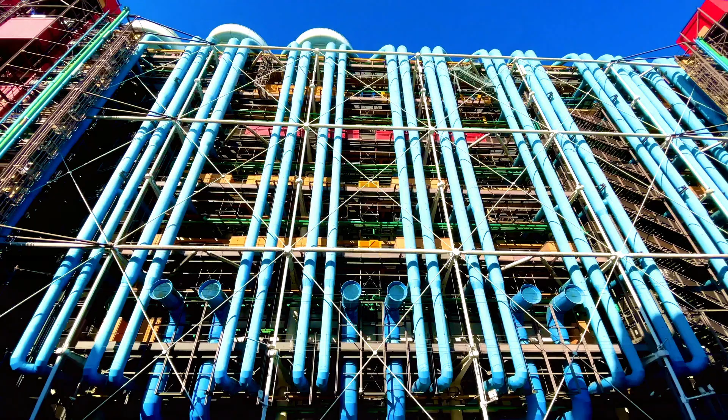But a building that's famous for its pipes is the Centre Pompidou in Paris, France. Renzo Piano and Richard Rogers designed it in a way that all of the service equipment would be shown on the outside, so the inner workings of the building are shown on the outside. Here you see pipes on this side of the building for water, ventilation, and so on.

And on this side of the building, you see the circulation. So you see this beautifully bent glass that is covering the hallways and the escalators, which are famously known as the caterpillar of the Centre Pompidou.

Now, I had the chance to work for Elioth, who was the engineering company responsible for the renovation of this facade. And we had to replace the glass, the beautifully bent glass, because of changing security norms. So we went on a mission to find a new home for the glass.

And luckily, we found the young designer firm called Maximum, who had a client that needed this bent glass for this project right at the same time that we were disassembling the glass. So the caterpillar became a butterfly.

Now, why do I care so much about the reuse of this glass, or the reuse of pipes, or the reuse of other building materials in buildings? Well, as actors of the construction sector, we have a crucial role to play in the climate crisis. Buildings are responsible for about 39% of all of our greenhouse gases,

and we've made considerable progress in how to reduce operational emissions, so that's related to the use of the building, so think of heating, cooling, ventilation, lighting, and so on. But the use phase of a building is only part of the whole life cycle of a building.

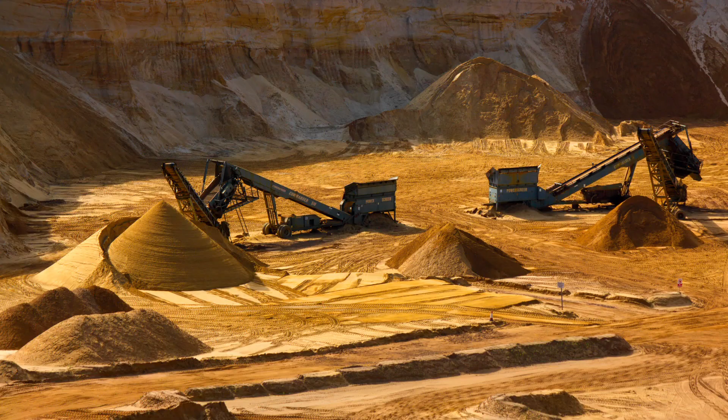When you look at the full life cycle, you also have to deal with embodied emissions, which is related to material extraction, production of building materials, bringing them to the sites, construction, maintenance, and end of life, which is usually demolition. It's not only about the greenhouse gas emissions, it's also about resource depletion. We're depleting a lot of resources for construction.

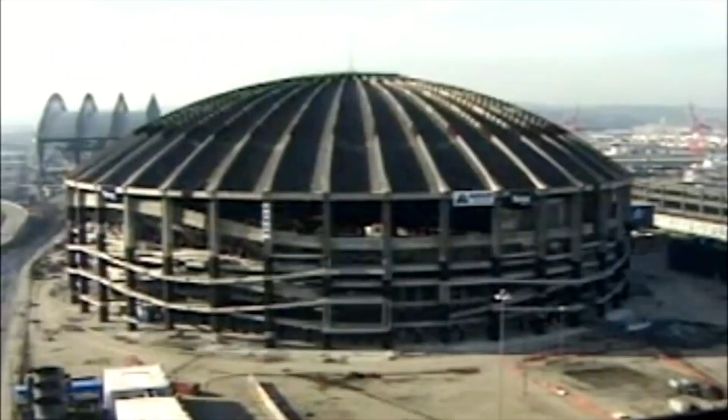For example, we mine about 40 billion tons of sand per year just because desert sand is too fine for construction. This creates a huge biodiversity problem. Sand mafias are created as well, so we need to deal with this. We're also creating a lot of waste.

Here is the Kingdome in Seattle that was demolished only 24 years after its construction. And this building was designed to last for 1,000 years. So in Europe, about 30% of all of our waste comes from the construction and demolition sector, and this number is even higher in Switzerland.

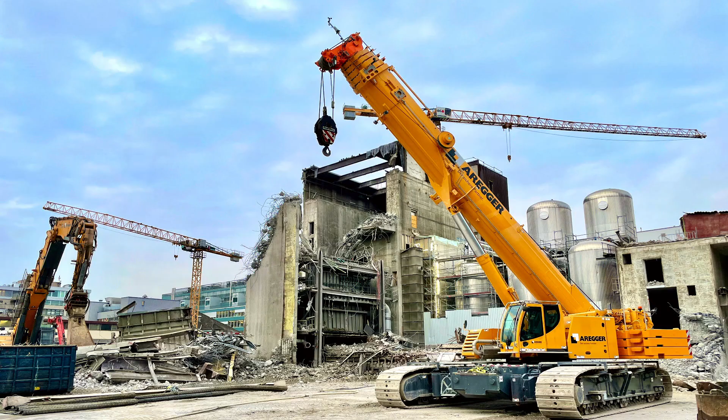So what's wrong with the construction industry? We build in what we call a linear economy model. So we extract raw materials, we produce building materials, we use them, and then we dispose of them.

What we need is a paradigm shift towards a circular economy model, in which we use only renewable resources, in which we use our buildings as long as possible, in which we repair our buildings, in which we reuse our building components, and if all else fails, we recycle them.

Now let me pause a little bit on the difference between recycling and reuse. So when you recycle a material, you take the component and take energy to bring this component back to its raw materials. Think of wood chips, of melted steel, of crushed concrete aggregates.

On the contrary, when you reuse a building material, you keep the component as it is. So think of reusing a wooden window frame, or a steel beam, or a concrete slab. Now, our lab is focusing mostly on reuse, and here's why.

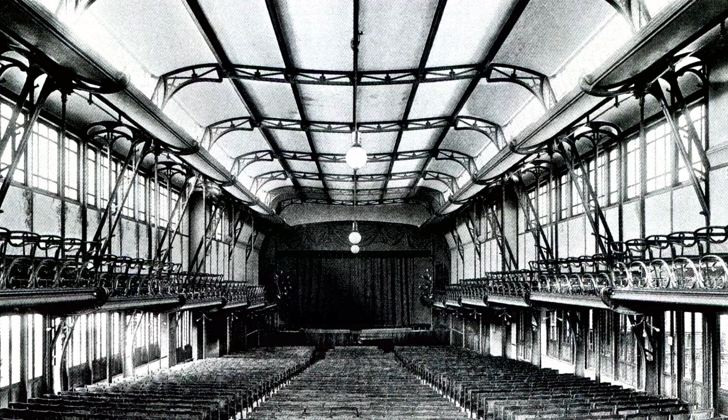This is the Maison du Peuple, designed by Victor Horta, a Belgian Art Nouveau architect. And this building was disassembled in 1965. People thought this structure was so beautiful that they stored this structure for 35 years until they could find a new home for the structure, the Hortazaal in Antwerp.

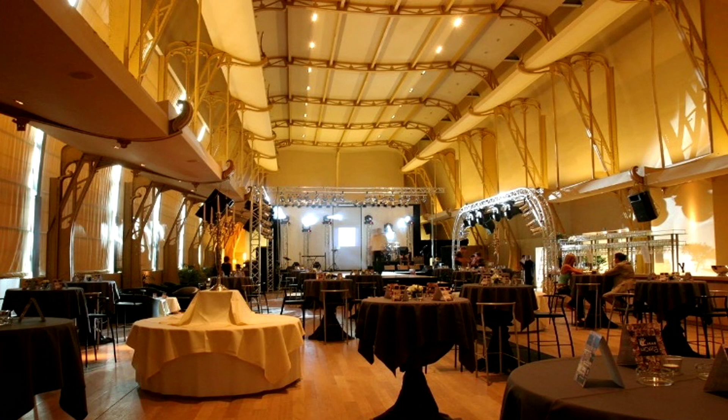Now, if we had recycled this structure, we would have used energy to melt back down the structure to its raw material. This would have probably downcycled the material. And wouldn't it have been a shame to lose all of the effort, the labor, the energy that went into making this beautiful structure? Now, you're probably thinking, well, we can't afford to store our materials for 35 years, right?

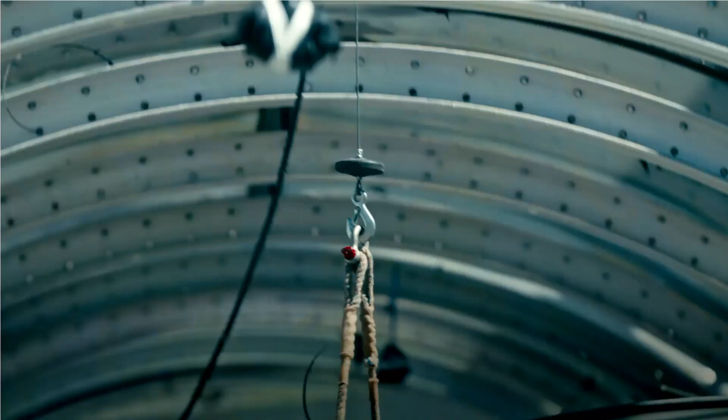Well, you're totally right. We have to align the moment when we disassemble a building with the moment when we reuse those materials in a new building. And that's what we did with the Centre Pompidou, where we had to disassemble the materials at the same time when the new client needed them.

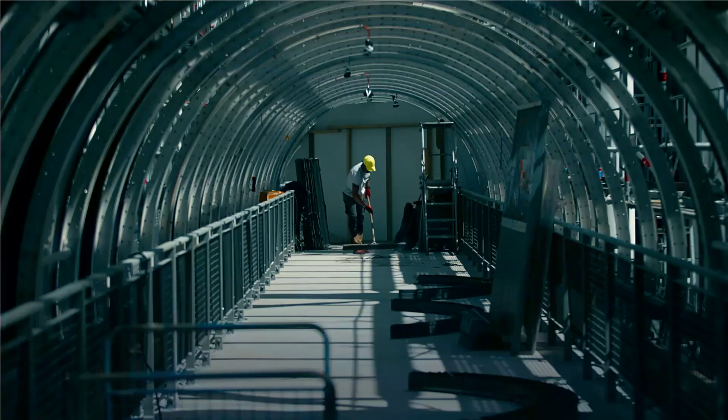Now, it's relatively rare today that the end of life of one building aligns with the start of life of another building. So to be able to move towards circular construction on a large scale, and not just for iconic buildings like the Centre Pompidou, like the Maison des Peuples, we need 5 things. First, we need data. Data on how, when, where materials will become available for reuse.

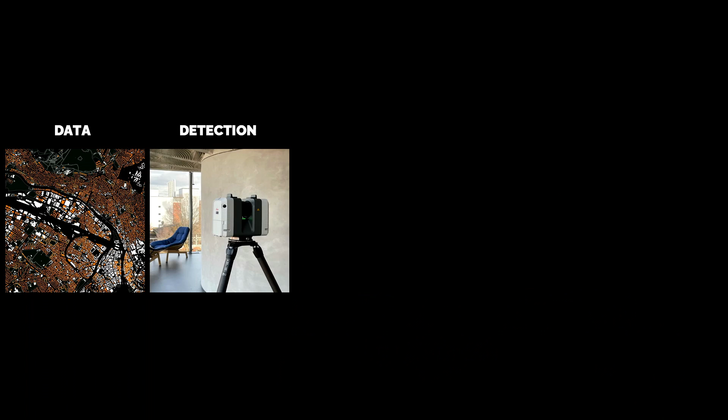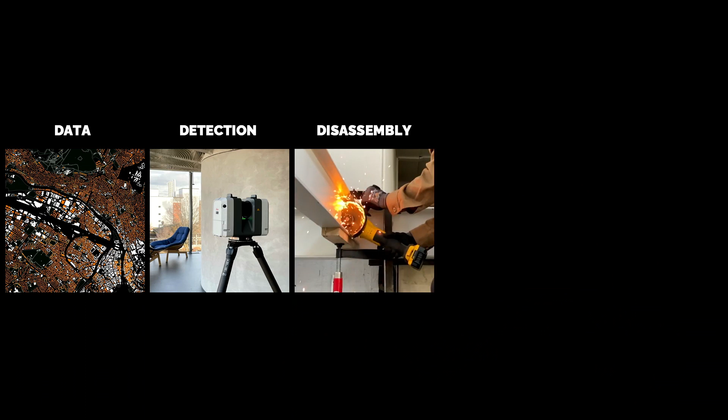Second, we need detection methods. Once we have identified a building that will be demolished, we need to detect which materials are in the building and in what condition they are. Third, we need smart ways to disassemble a building. We need it to be cheaper than demolishing.

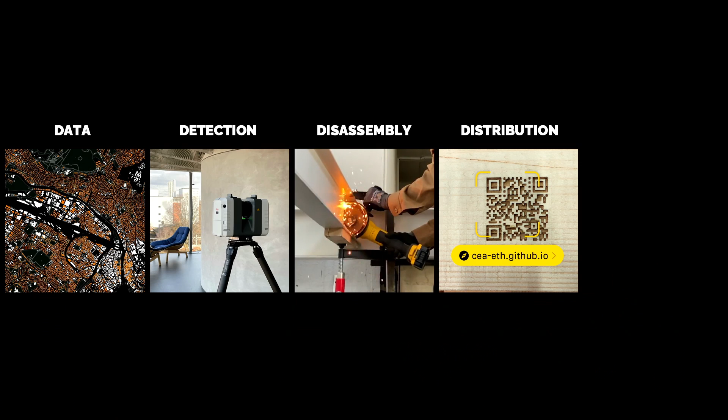And fourth, once we have disassembled a building, we need to distribute those elements by giving them an identity, by tracking, tracing, and trading them. And fifth, we need to completely change the way we design and fabricate our buildings. Now, these are also the 5 steps of our research at the CEA lab that I will talk about today.

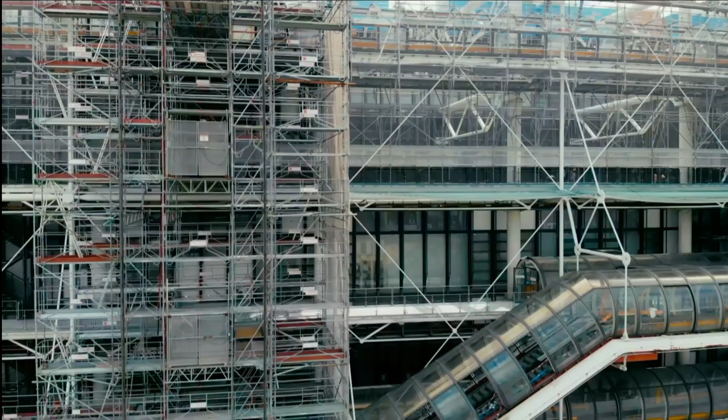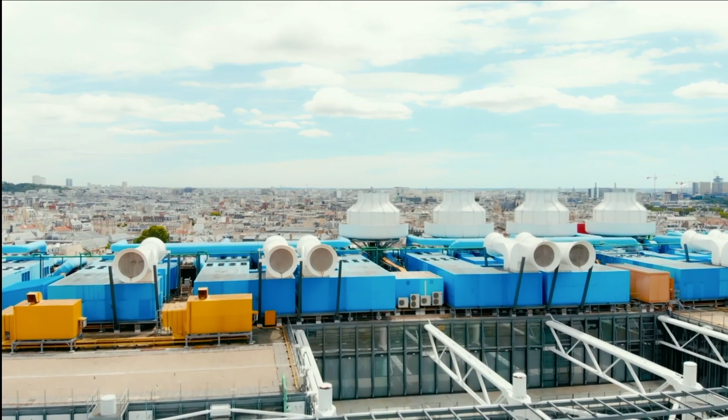So our question is, could digital innovation help us disassemble a building and reuse its building materials in a much faster, better, and cheaper way than ever before? Because only then will circular construction be competitive enough so that we can abandon the linear model. Could digital technologies help us save not only the glass of the Centre Pompidou, but also all materials of other buildings worldwide? Could digital technologies help us use buildings instead of the earth as a mine? Could buildings become material mines, material depots, material banks?

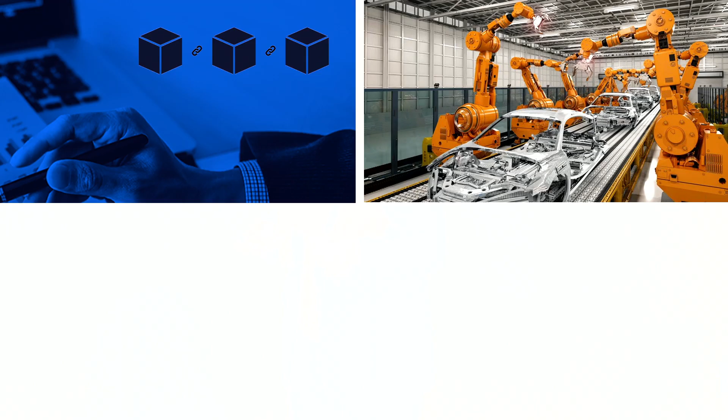Now, the construction industry has been famously known to be slow in adopting digital innovation, even though digital innovation is everywhere and growing. We've used blockchain technology in about 20% of traditional banks. We use robotic manufacturing everywhere in the car industry. We use artificial intelligence or AI literally everywhere, from online marketplaces like Amazon to dating platforms like Tinder.

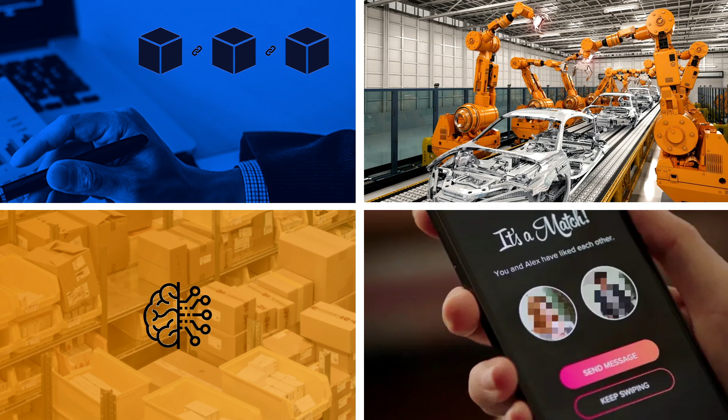So we were wondering, could these digital technologies help us bring the construction industry towards circularity? Could these digital technologies help us face the biggest challenge that construction is facing today, this transition to a circular economy? And that's exactly what the CEA lab does. We explore those digital technologies that are used a lot in other sectors. We bring them to the construction sector to see whether this can improve our circularity.

So to do so, we had a flagship project that we worked on in the last few months, where we actually disassembled the building and reused the materials and tested all of those digital technologies on this flagship project. And we did this together with Materiuum, one of the prominent reuse actors in Geneva, where we disassembled this building here that you see on the left. That was an old car warehouse in Geneva. And with these timber beams, we built a dome-shaped greenhouse in Zurich.

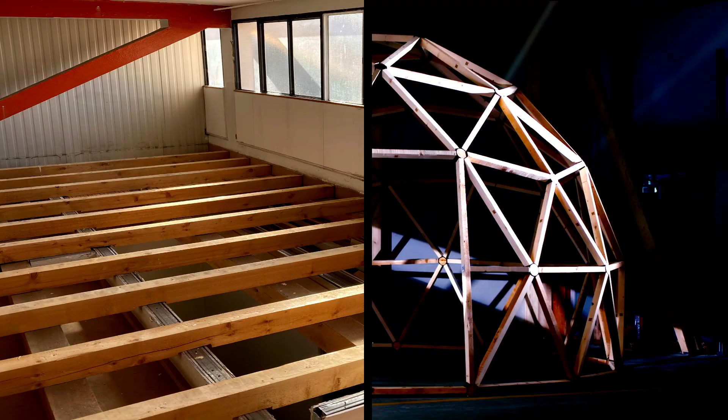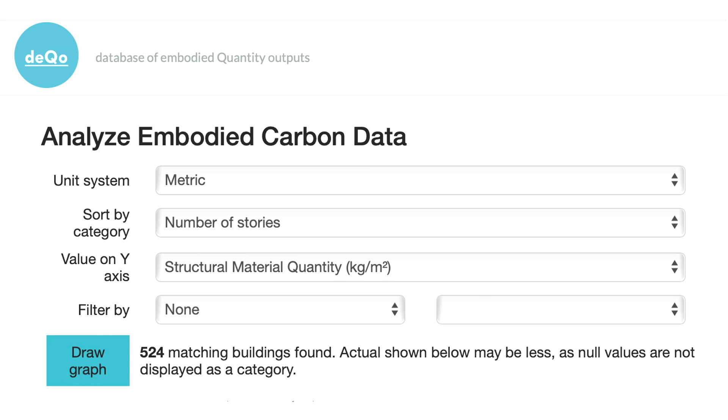Now, as you've seen, our research is divided in 5 topics, and the first is data that we need to predict when materials will become available for reuse. Now, when I was doing my PhD at MIT, I was already working a lot with data. I created the database of embodied quantity outputs, or deQo, which is a database that collects structural material quantities from structural engineering companies such as Arup, Thornton Tomasetti, SOM, and so on, so that we could compute the embodied carbon of these building structures.

Now, one interesting thing that I learned from here is these are the type of graphs that you can see on deqo.mit.edu. So here on the y-axis, you can see the structural material quantities in kilograms of material per square meter of floor area. On the x-axis, you can see the number of floors. So you see here on this graph that the higher you build, the more you need materials per square meter of floor area.

This is interesting because this was confirming what Fazlur Khan, the famous skyscraper architect and engineer, already told us in the 60s, that we pay a premium for height. The higher you build, the more you need to take into account other loads like wind loads, for example.

Another thing I learned from my database was that the Beijing Olympic Stadium, also known as the Bird's Nest, uses more than 10 times the embodied carbon compared to the London Olympic Stadium. Now that's interesting because the London Olympic Stadium was built 4 years later with a change of mindsets, right? Sustainability became much more important, and they set this right at the design stage as a goal.

So they used lower carbon concrete mixes. They reused some materials from a gas pipeline construction site nearby. They also designed the stadium to be partially disassembled after the games. And so you see that if you put the right goals at the design stage, you can really improve your impact on the environment as an architect, as an engineer, as a contractor.

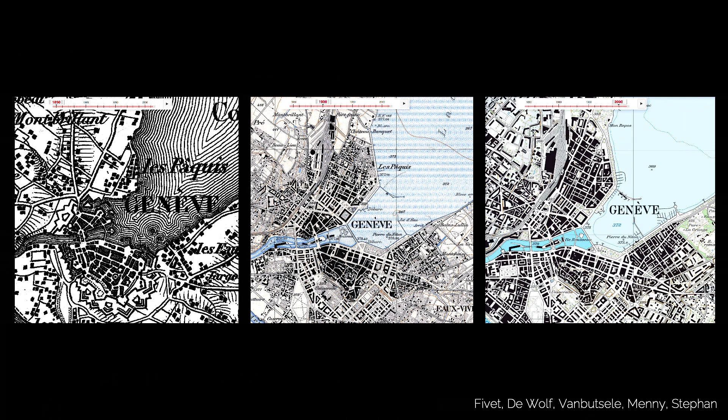Now then, I did my postdoc at EPFL, where I upscaled this research on the urban scale, where I looked at the city of Geneva. So we looked at embodied carbon emissions throughout time. So we went into the archives until 1850. And so we mapped the embodied carbon and construction/demolition from 1850 till today. This is very interesting because the past can teach us a lot about why buildings are getting demolished or constructed.

Now at ETH Zurich, at the CEA lab, we look not only at the past, but we also try to look at the future. We try to predict when buildings will become available for reuse. To do so, we use AI, artificial intelligence, and more specifically machine learning, to predict when these materials will become available. We apply big data analytics on various data sources that can help us detect demolition sites or renovation projects and so on. So algorithms can identify patterns in the data to help us make those predictions.

So for example, here you see the machine learning work of one of my PhD students on Google Street View data. So we have a lot of images from facades on Google Street View, and so we labeled these images with an online annotator so that we could train the model. We explored instance segmentation to identify reusable components. We used a mask region-based convolutional neural network framework for computer vision tasks to detect objects such as windows that are available for reuse from those images of those facades.

So as I mentioned, we use various data sources. Google Street View is one of them. There are many, many images for many cities that are available that we can learn from, but we combine this also with cadastral data. Lots of cities also have geographical information system maps, GIS data, and the city of Zurich, we're quite lucky here, has a lot of data.

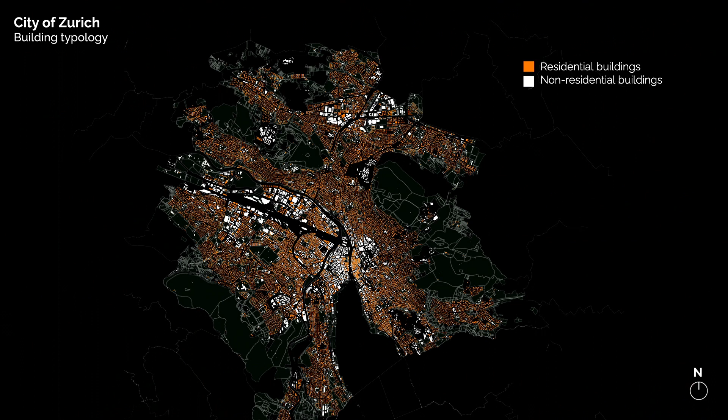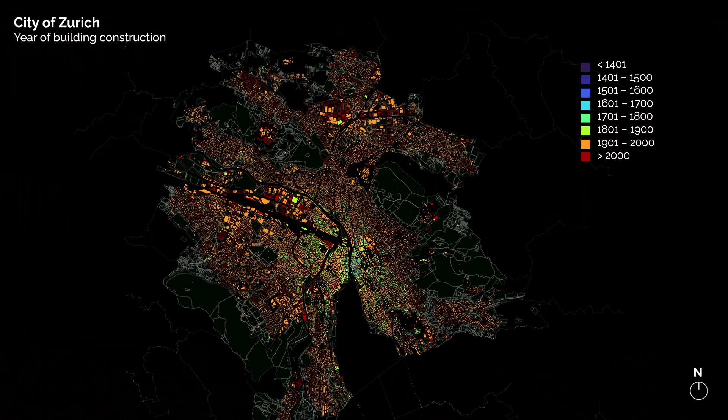We also can gather a lot of information these days from social media. That's also super interesting for us to work with. From public records, we have lots of archives and other data that the city of Zurich makes available to everyone. Another thing that's very interesting is using data from insurance companies, because they also try to predict the future. And then, of course, data that comes from our colleagues.

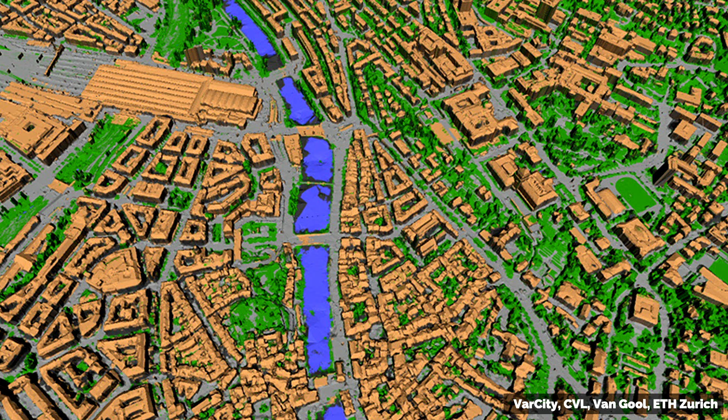The Computer Vision Lab, for example, here at ETH Zurich, has developed this project called VarCity, where they made a 3D model of the city of Zurich based on aerial data, based on public webcams, and so on. We're also quite lucky here that this photographer in Zurich took some pictures of lots of buildings in the 20th century with the exact addresses of all of those buildings, so we can actually compare them to what they've become today. And this helps us also to understand how buildings evolve over time.

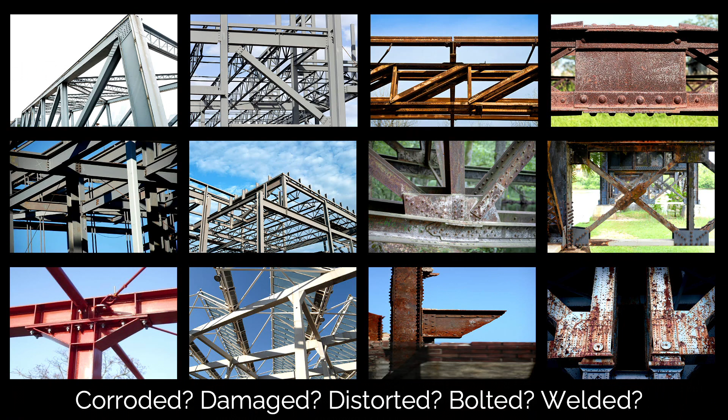Now, once we've predicted which buildings are available for reuse, we also need to check whether the materials are actually suitable for reuse. So we also use machine learning for this. We do this work with Politecnico di Milano, where we define different evaluation metrics and use image classification to define which structural elements can be reused or not, based on things like, are they corroded, damaged, distorted, are the connections bolted or welded, and so on. So machine learning, and computer vision in particular, shows really promising potential for collecting data visually on building-specific characteristics that are useful for reuse.

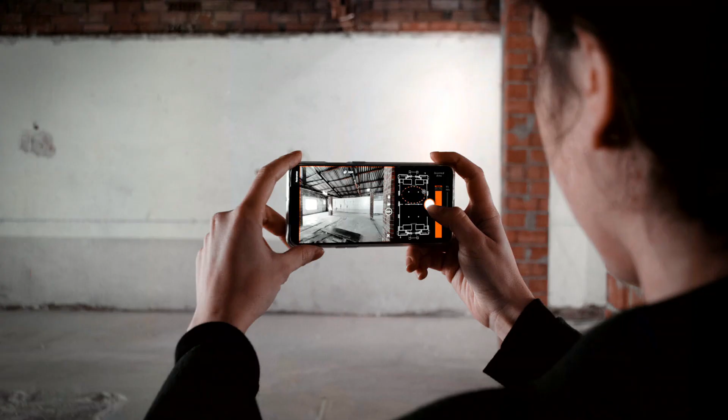All right, so once we've identified buildings that are about to be demolished, we zoom in onto the building, and we try to detect which materials we can reuse. So we use a lot of digital technologies in the field of reality capture, and this goes from simple photos from our phone cameras to photos taken with autonomous devices like drones.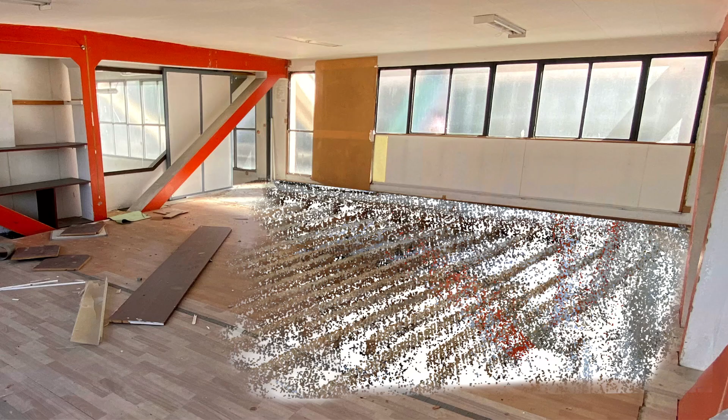Or we also use webcams on our hard hats that are connected to a software that reads where you're walking in the building throughout your scanning. So here you see one of my PhD students using the OpenSpace.ai software to do so in the building in Geneva that we disassembled. So then we use photogrammetry to process the images into estimated point clouds. So these are point clouds from the building in Geneva that we disassembled.

What's interesting is that you always have to be on the spot when you want to have some material salvaged from a building. This was the old Fiat, Lancia, and Alfa Romeo importer, and this building became obsolete. So they're going to demolish it for something more tall, probably. And usually when the buildings are obsolete, they give them to the police so that the police can do some training and explode some doors or walls and so on to break into a building.

And then after the police is done, then there is my time window before the demolition starts where I can do my research and I have access to the building and I can salvage any material that I want. So that's usually how our research works.

We also scan buildings that are not so soon set for demolition, but using light detection and ranging, so LiDAR scanning techniques. So we tested this full-scale LiDAR scanner that we borrowed from the Design++, so the Center for Augmented Computational Design in Architecture, Engineering, and Construction that we collaborate a lot with. And we scanned the DFAB house at the Nest building in EMPA.

So the Nest building is a building at EMPA where you can test some of our research. So we actually get to build entire units, test our research on a scale 1:1. And my colleagues from the National Competence Center of Research for Digital Fabrication, the DFAB NCCR, have built this DFAB house in the Nest EMPA building.

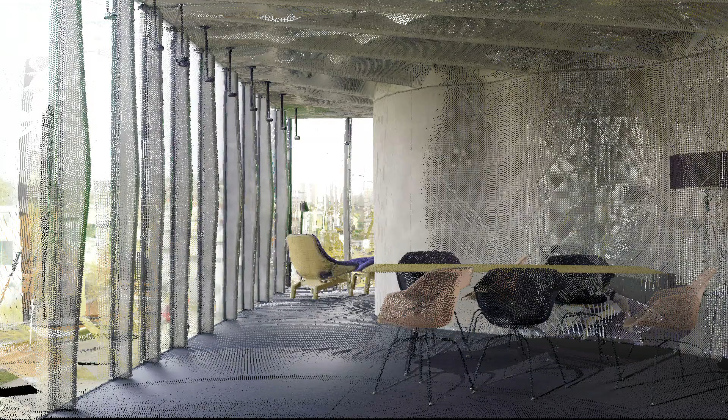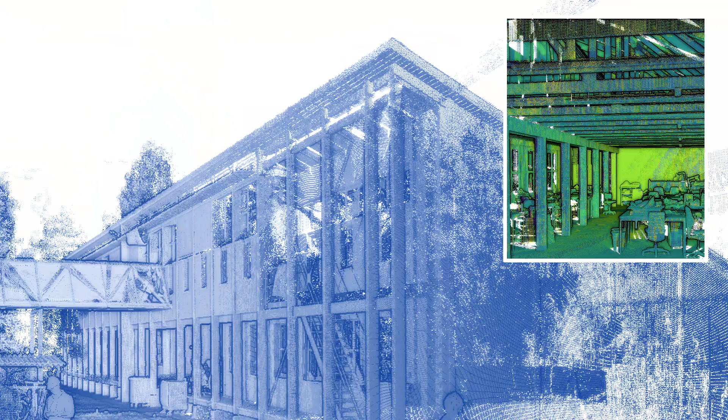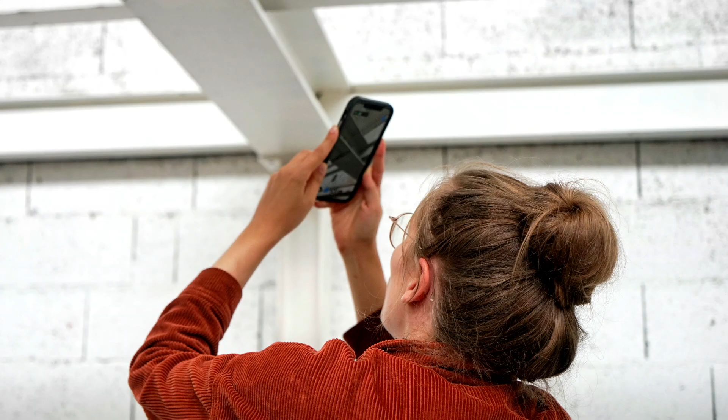All right, so we also take a look at mobile equipment, industry standard LiDAR, digitization systems, and so on. Here is another LiDAR scan of the Huber pavilions. Maybe those of you who've been to the Hönggerberg campus have seen them. They're about to be disassembled, and we scanned them beforehand. We also tested some apps on our smartphones.

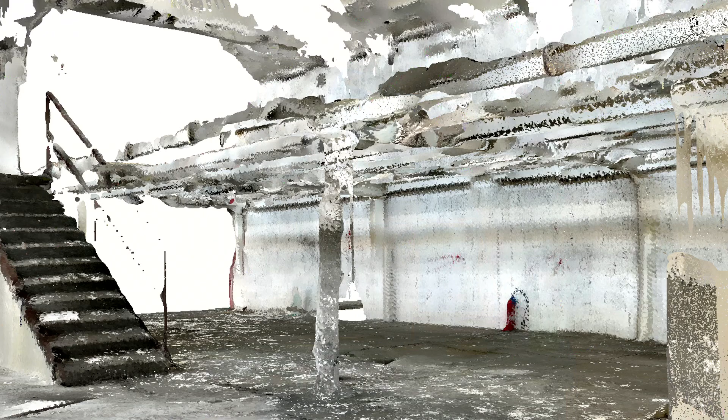This is me scanning the building in Geneva with my smartphone that has some LiDAR capabilities, using apps on the phone, just because we think it's important to also test mobile-based, accessible equipment, right? The LiDAR scanner I showed you in the DFAB house is super expensive, so we cannot expect all of the reuse actors to own such equipment. Of course, the smartphone LiDAR scanning is a little bit less accurate, so we have to evaluate what we can do for reuse with the scans.

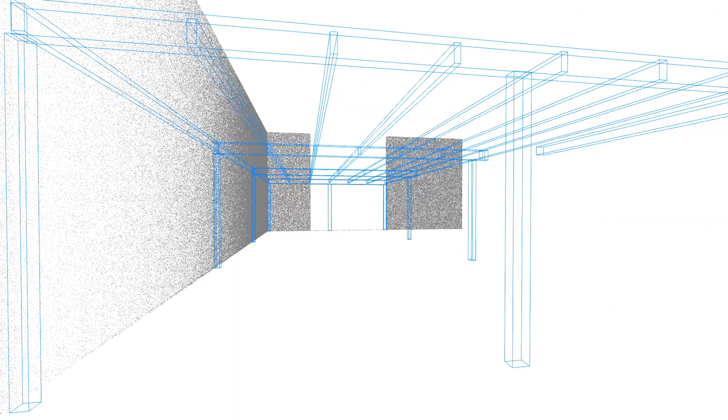So next, we have the point clouds. This is very unstructured data in a way, so we need a method to make a BIM model, a building information model, out of this unsorted scanning data. So we need to identify the types and forms of building elements on site. So we developed several scan-to-BIM methodologies to do so. We try to detect the beams and columns based on point density, on statistics, on matching, and so on. We also try to identify how the elements are connected to see how recoverable those elements are.

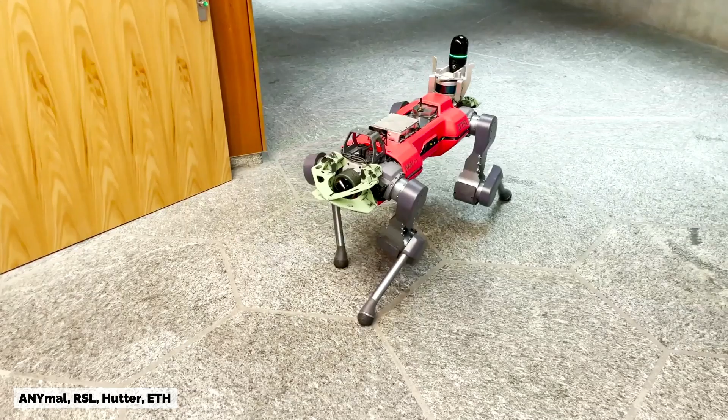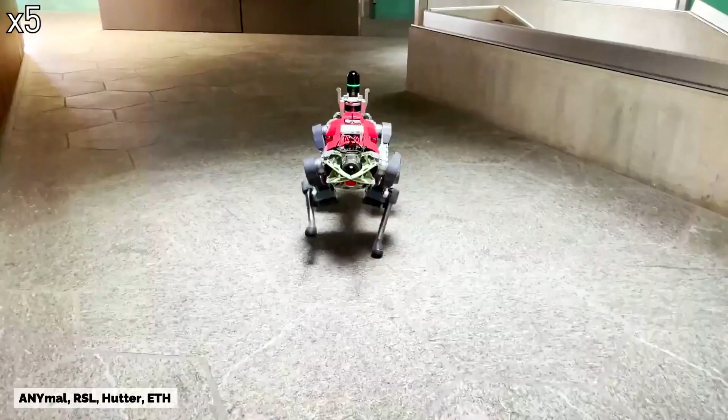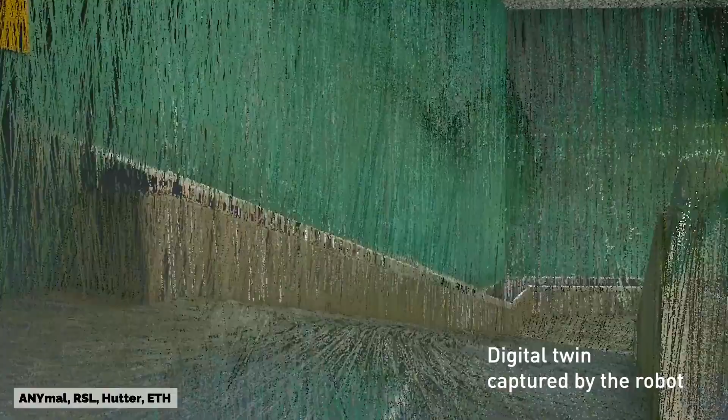So in the future, we're planning to collaborate with the Robotic Systems Lab in the Mechanical Engineering department here at ETH to apply their work on combining LiDAR scanning with their beautiful ANYmal robot that is walking around the campus there, making a digital twin of the building. And so I think this is a very interesting and promising research area where we combine our research on circular economy with their research on robotics so that we can make a BIM model for reuse in a completely autonomous way.

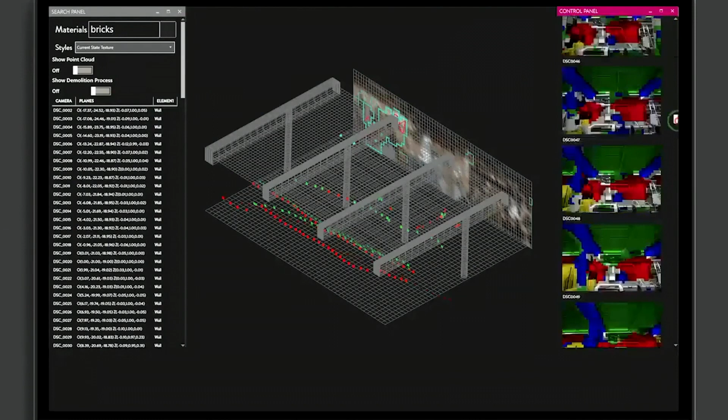So once we have the geometric shape of the building components into our BIM model, we also use image-driven data intelligence to augment the BIM elements with reuse-relevant information. So we need to know not only the geometry, but also the type of materials, right? What conditions are the materials in? So here you see, for example, 2D and 3D computer vision techniques that are applied to classify images captured on site into material classes: masonry, steel, concrete, wood, and so on.

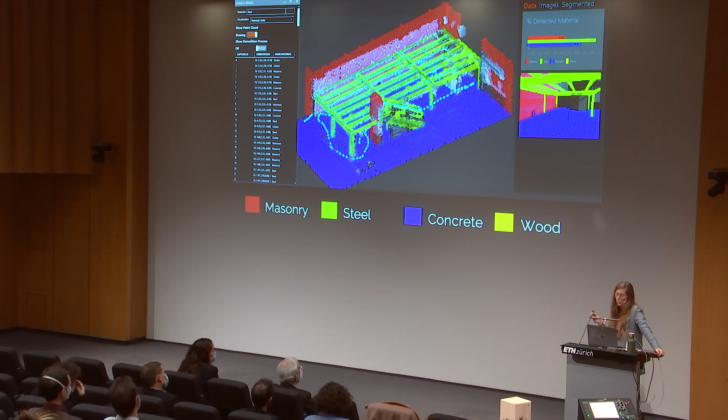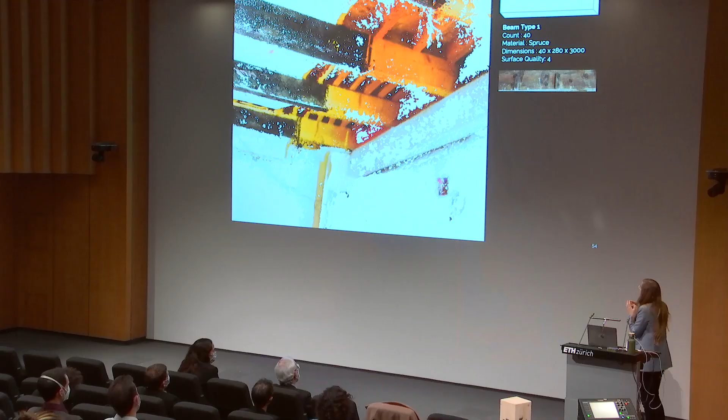We also want to identify what condition the materials are in. So our work is based on traditional feature-based algorithms and on state-of-the-art convolutional neural networks. So these scan-to-BIM technologies enable us to make an inventory of the beams that we disassembled. So we have information like the type of wood, the condition in which the wood is, the dimension of the element, and so on.

So based on the point clouds that we had of the old car warehouse and on the computer vision techniques that we applied, we can define or make a BIM model of a building that doesn't have a BIM model, that doesn't have information, and we can make an inventory, which is very useful in the design stage, you'll see later. We also plan to collaborate more with Design++ on using virtual reality to walk throughout a building and have some information about the demolition site that you are walking through.

All right, so once you have scanned the building, made your BIM model, made the inventory of your building materials, you can actually start disassembling it, right? But disassembling is much more challenging than demolishing a building. You need more care, more skills, sometimes more time. And I like to teach my students hands-on what it means to be on a demolition site, what it means to disassemble a building. And so this is one of the courses that I co-organized with the EAST Lab at EPFL on the disassembly of the old tram depot in Bern, where we went on site.

We co-organized this also with Rotor, one of the major Belgian reuse actors, together with Losinger Marazzi, the Swiss daughter firm of the big industrial group Bouygues, who gave us access to this old tram depot from 1906. We had no information about this tram depot until one guy randomly walked by our deconstruction site and asked us, "What are you doing?" And we said, "Well, we're disassembling this building for reuse and so on." And he said, "Ah, but that's super cool. I'm a big fan of the tram depot. I have the original blueprints from 1906 at home."

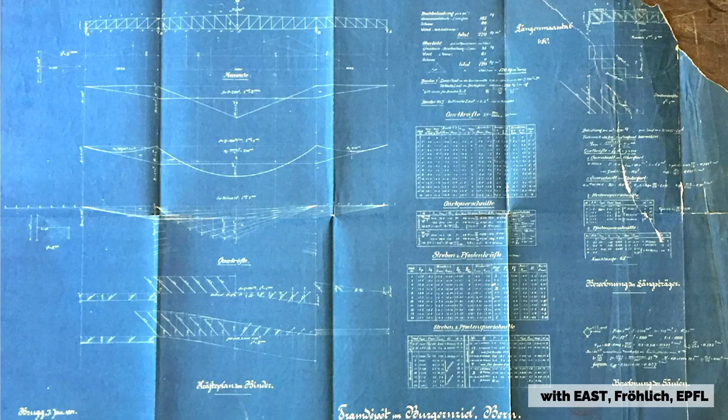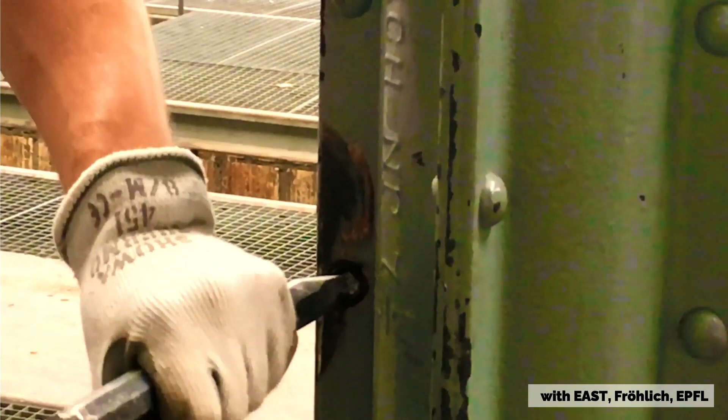So apparently people own blueprints from public buildings at their home. So this shows really how random information of today's building stock is. Here you see our students trying to disassemble the beautiful structure. We hope to reuse this structure in another building. It's very challenging, and they learn a lot about what is a good way of disassembling on site.

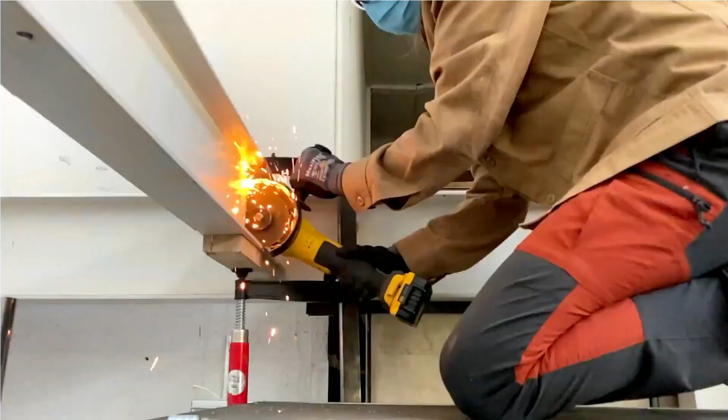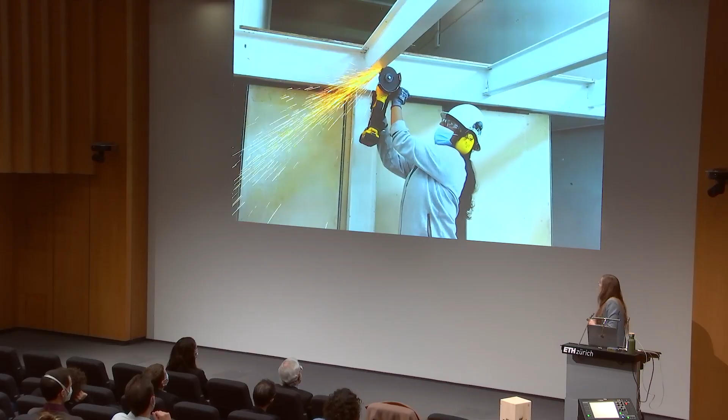This is me also cutting a steel beam. This is in the car warehouse in Geneva. And these steel beams were welded, unfortunately, so we had to cut them if we want to reuse them. And it's a very sensorial experience because we used battery power tools. And after each steel beam that we cut, we had to recharge our batteries. So it shows us really hands-on how much energy you need to cut steel beams. And it really convinced us to make reversible connections in our new designs and to go for bolted connections, for example.

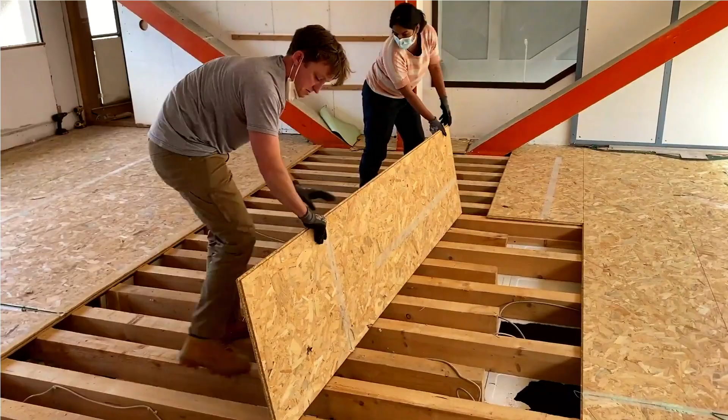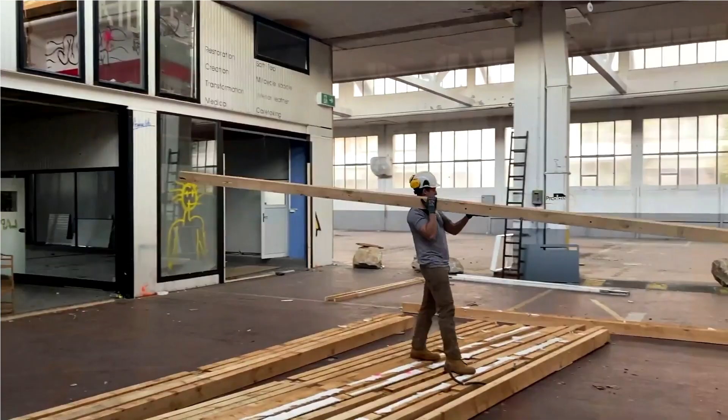All right, we also disassembled some OSB boards. Lots of them, actually. Lots of timber beams that were in perfect condition. The timber beams were way less challenging to disassemble because they were just screwed together. This, again, convinces us that dry connections are really the way to go. Then the next challenge is the transport of those materials. We had to transport those beams to our van.

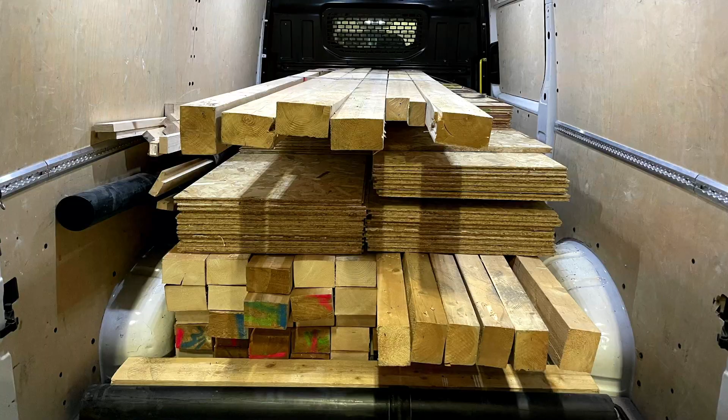They were between 2.5 and 7 meters long. And this is us transporting it to our van, which of course is only 3.5 meters long. So what do we do with the 7-meter-long beams? Well, we stored them, Materiuum stored them, and then brought it to us on campus later on.

But this shows us that transport and storage is really a challenge in the world of reuse. And we should really try to align as much as possible the time you disassemble a building with the time that you reuse the building materials in a new construction. That's why the preparatory work—prediction, scanning—is so important. So once we had the beams, we also scanned them with a metal detector to remove any foreign objects

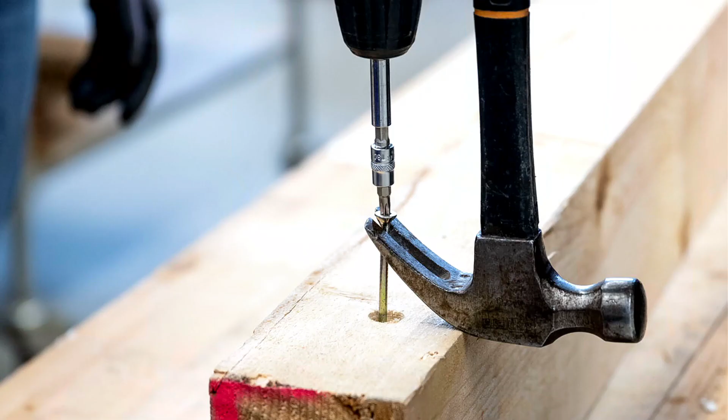that could damage our machines used for reprocessing the beams. We also planed the beams so that we could remove any surplus. And throughout all of this process, I thought this was very fun to do with the students, but could we also use robots or some kind of digital fabrication to disassemble a building?

I talked a lot with my colleagues from the NCCR on DFAB. We have this beautiful gantry robot at ETH, and that's a very good machine to robotically assemble digitally fabricated structures off site, in the workshop. But it's much more challenging to bring a robot to a site that is dirty, unstandardized, cluttered, and has a lot of heavy objects to lift. That's basically the definition of a deconstruction or demolition site.

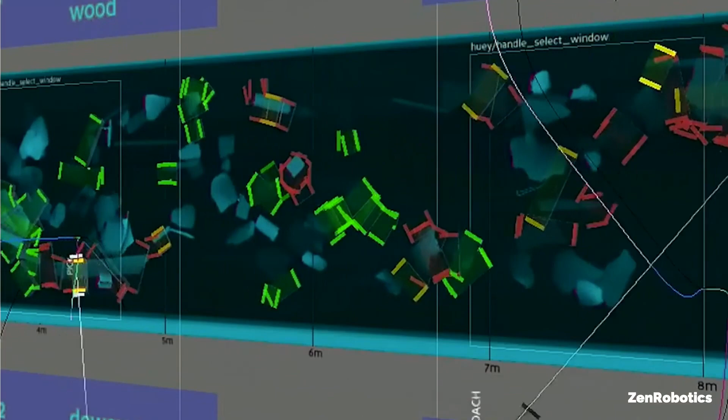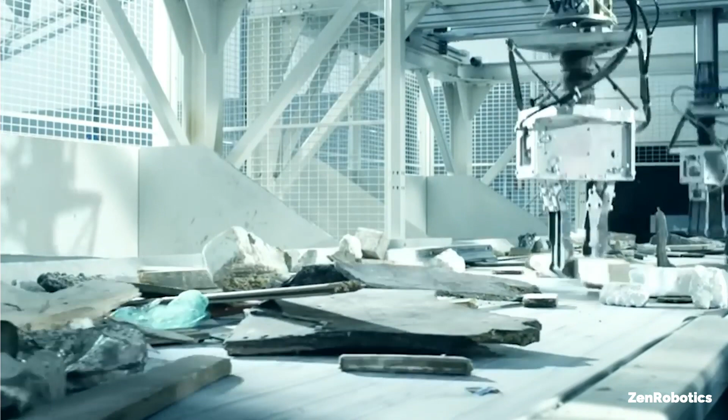So we still need improvement in the field of robotics, and that's also what we're discussing with the NCCR DFAB, to see where it could be useful in the disassembly process. However, there are companies such as ZenRobotics that use robots and AI to detect in complex construction waste environments how to sort materials for recycling. Here, of course, it's about construction waste—it's hard to reuse them, but at least they do this for recycling. But I think it's not so far-fetched to imagine a future in which we could use robots also to help us with reuse.

All right, so the next step after disassembly, we have all of these materials. We need to distribute them to the new construction sites, and we need to do that as efficiently as possible. So we need a good tracking, tracing, and trading method throughout the element's different life cycles.

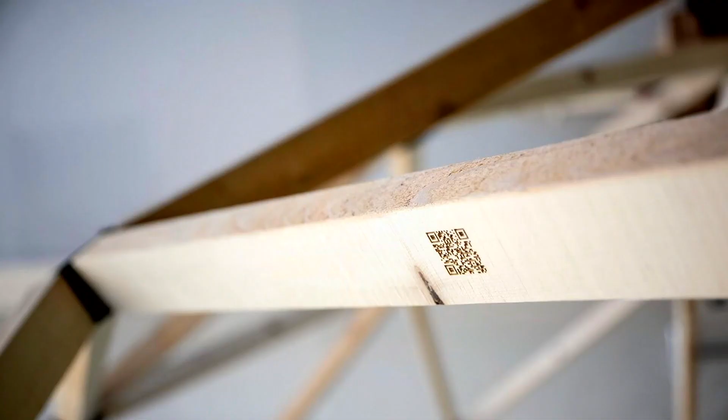So we reused the timber elements that you saw earlier and reprocessed them to make this dome. And on each of those elements, we engraved QR codes, as you can see here. When you scan the QR codes, they lead you to a database that one of my PhD students developed, and he's doing a lot of research also on how to maintain and store data throughout time, because building life cycles are really long.

Usually buildings get demolished maybe 20 or 50 years from now, and that's when we need to know which materials are in the building so that we can reuse them. So once you scan the QR code, it gives you information about the component, like this. It gives you information about where the component has been before, where it is now, what the dimensions are, what the wood type is, for example, here, what the condition of the materials is. It also gives you information about all of the other components of that same type in the building, and about the other types of components in the building.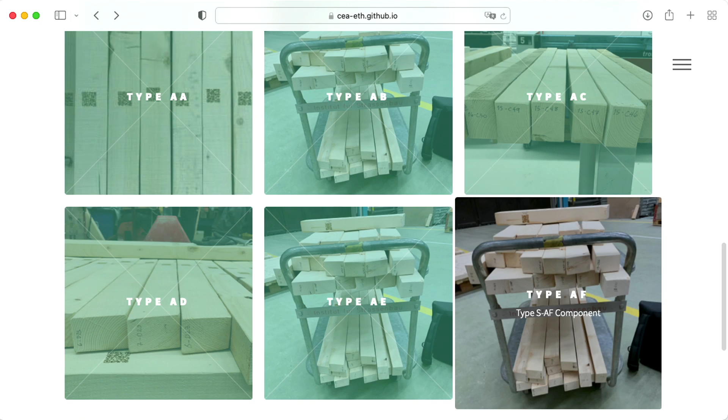So this is really what we call a material passport of the building. It has a passport of all of the materials that are in the building, how much of these materials there are, and what they've been through throughout their lives. That's really interesting because once a building gets demolished or renovated, we know exactly what materials are in the building, how much, in what condition, and what they've been through throughout their lives. That's really the kind of data we need to reuse those materials. We work together with Madaster, Concular, and other companies, asking them how to implement that into the construction market already today.

Now, I mentioned QR codes.

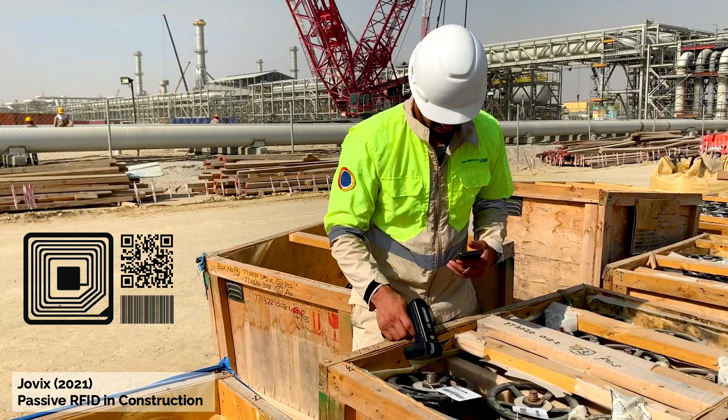QR codes are the choice we made for our dome because we want everyone walking by to be able to scan them with their smartphones and get information about it. But we can use different labeling systems, from barcodes to RFID chips, radio frequency identification chips. The advantage of RFID is that it doesn't have to be visually available—you can scan it through other layers, which makes sense for the construction industry. But then you need special equipment to scan it; you don't usually scan it with your phone. So there are advantages and disadvantages to all these labeling techniques.

But the point is, once you have these ways of tracking materials, you can link them to a digital twin, and you can also link them to each other. You can use the Internet of Things to connect all these materials to each other, and also help predict maintenance, refurbishment, and replacement needs.

Now, the construction industry has regularly been cited as one of the most fragmented sectors. Blockchain technology could potentially help us connect the supply chain through transparency and traceability—transparency into where materials are, and traceability of where they've been. For example, Tata Steel uses blockchain to trace things like CO2 emissions, product conditions, or change of ownership of their steel beams. They give each steel beam a unique ID or material passport, tracked from raw materials to use, reuse, and recycling through this blockchain system.

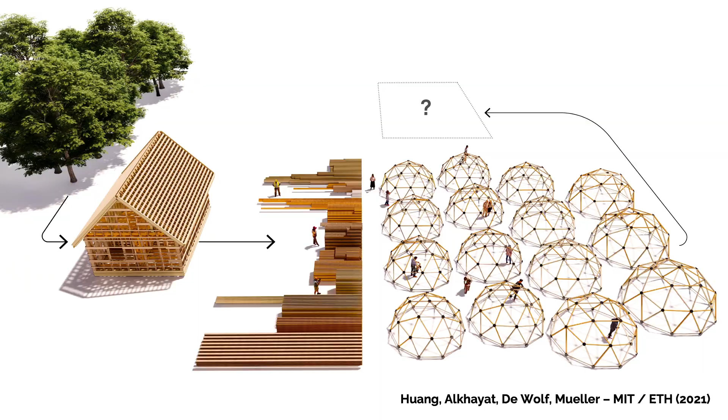Last but not least, we have to completely change how we look at design and fabrication of our buildings. We need to design with what we have, with the available stock of materials. This is work with MIT where we applied computational design algorithms to an available stock of materials—timber beams from a timber-framed house—and designed some geodesic domes with it.

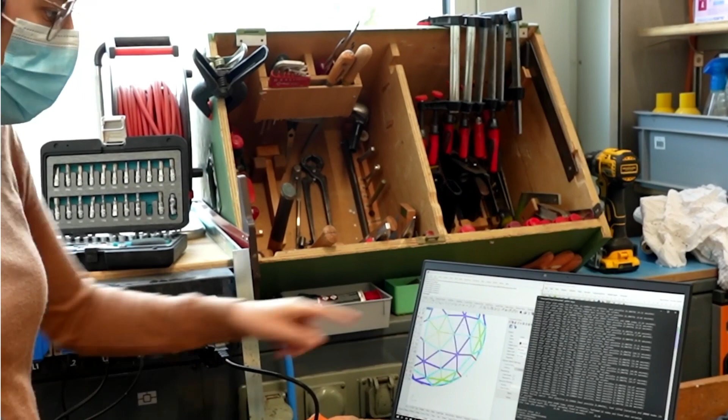Here you see the inventory of beams we got from the building in Geneva. We thought, well, we have some timber beams here, so let's actually build the dome. We discussed different design choices that you can parameterize in the computational design algorithm to make choices for our dome—for example, we don't want to use the 7-meter long beams, but privilege using the shorter beams. We also want to minimize waste; here you see the white part is the waste elements of our dome.

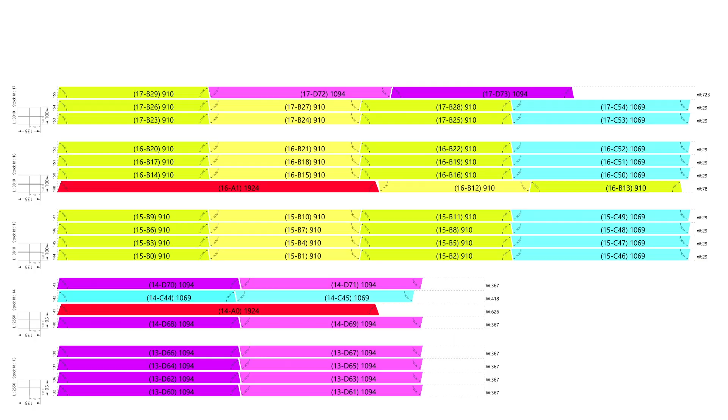These are the beams in Geneva that we used for the dome. We made some furniture with the waste elements to sit in the dome, because the dome was built in the Bauhalle, and we realized some people used it for their lunch break—they put tables in there, so we added furniture for them to sit on. It's always nice to see your projects being used and useful for society.

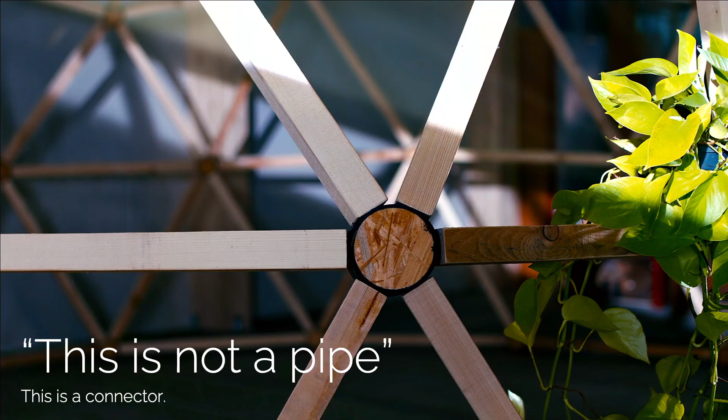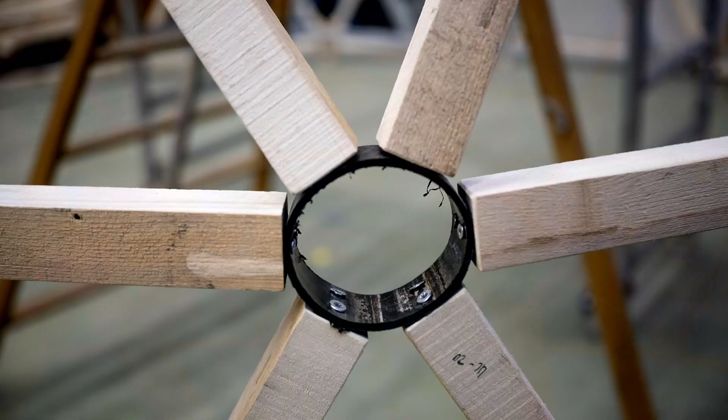All right, so are you ready to see what a pipe can become when it's not a pipe? It can become a connector—it became a connector in our dome project. The reclaimed pipes from Geneva became the connectors for our greenhouse dome, but it hasn't always looked this beautiful. We first had to test the strength of this connector, because it's a pipe we had no information about—just reused materials. We realized very soon that we needed to strengthen these connections and also aesthetically finish them.

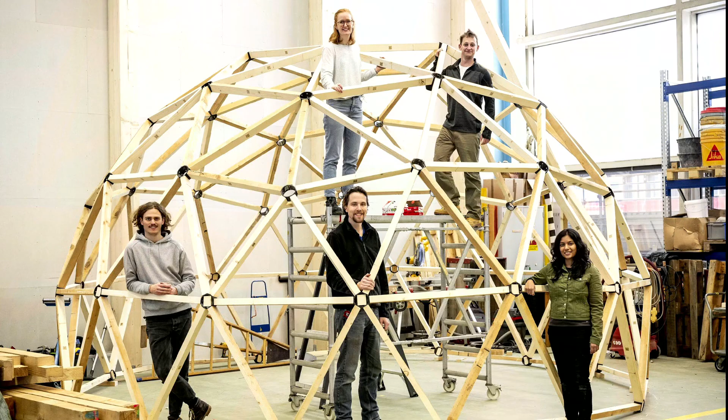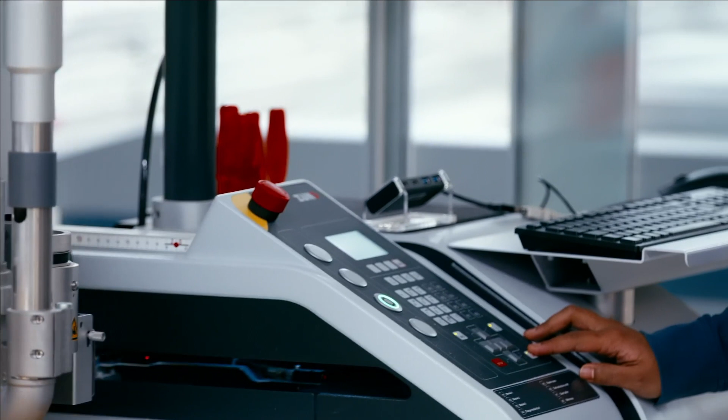So while part of our team was assembling the dome, the other part was applying CNC (computer numerical control) milling to the OSB boards we had left from Geneva, to make round shapes that would fit right into the pipes. This would have been impossible without digital fabrication, because we needed the speed, the precision, and the ability to adapt to the pipes we found in the building we disassembled. So it's not about using robots for everything, but here digital fabrication techniques were very useful.

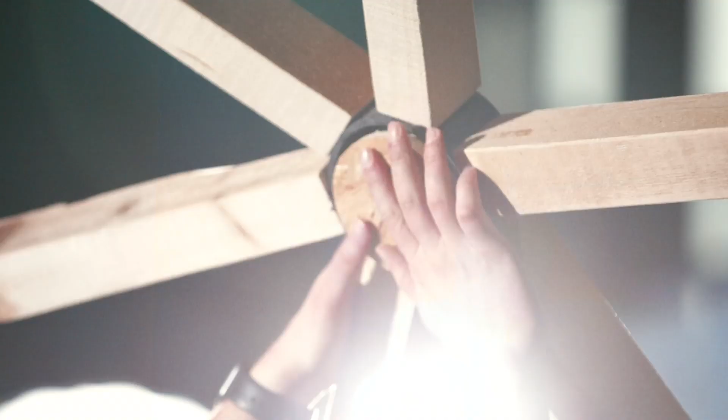This finished off the structure of our dome, showing that a pipe can become a connector, like a caterpillar can become a butterfly. I'm happy to say the dome will become a circular hub, then an outside meeting space for a city hall, and finally a greenhouse.

Some of you may know about the summer course I'm giving this summer at ETH, where we'll go through this whole process of digitalization again at each step. We're also going to build a dome on campus, which will be there for the entire summer for you to come and see. Lots of students are excited about this hands-on experience of digitalization for circularity.

I want to conclude my lecture with this quote from Buckminster Fuller, a famous futuristic inventor and the popularizer of the geodesic dome. He said: you never change things by fighting the existing reality. To change something, build a new model that makes the existing model obsolete.

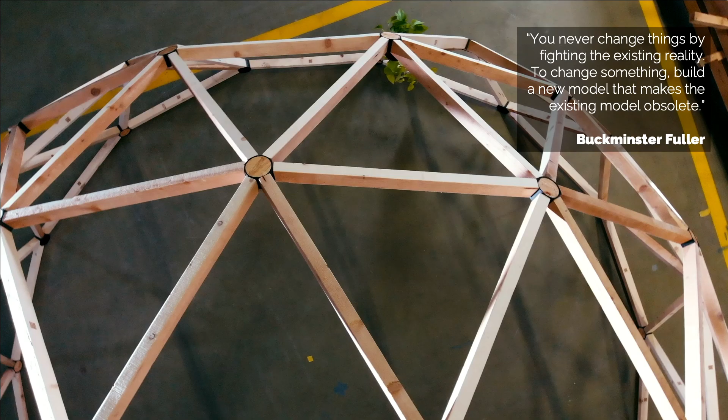We clearly need to change the current linear model that is polluting, depleting our resources, and generating waste. But we'll only be able to do this if we can show that the circular model is competitive enough—faster, better, cheaper, just the most common sense thing to do. And I strongly believe we need to explore digital innovations to get us there.

That is what the Circular Engineering for Architecture Lab is all about. If you need to take home one message, it's that if we want to make buildings part of the solution rather than part of the problem, you need to treat building components like you treated your Legos when you were little. You need to give them multiple lives.

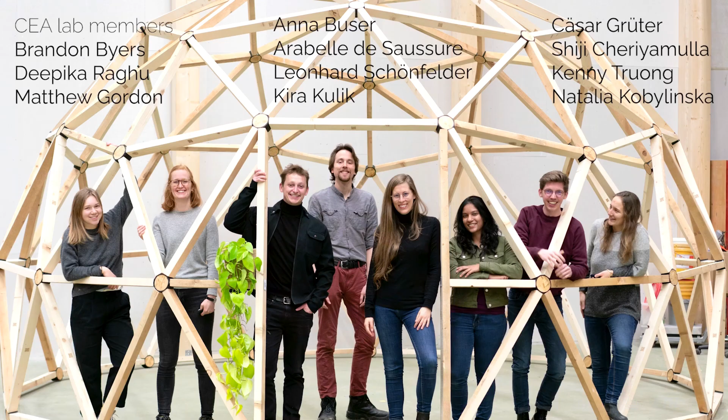I want to finish this lecture by thanking my team, the CEA Lab members, because without them all of the work I presented today would not have been possible. They've done such hard work, and they're such talented, intelligent, passionate, driven, and kind-hearted people. Thank you very much to the CEA Lab people.

I also would like to thank ETH for warmly welcoming me. I would like to thank my colleagues from D-BAUG, D-MAVT, D-ARCH, and other departments, because my research is inherently interdisciplinary, so I really need your support and expertise to pursue my mission. I would also like to thank ETH, and in particular the president, Joël Mesot, for giving me this huge and incredible opportunity to explore the circular construction industry.